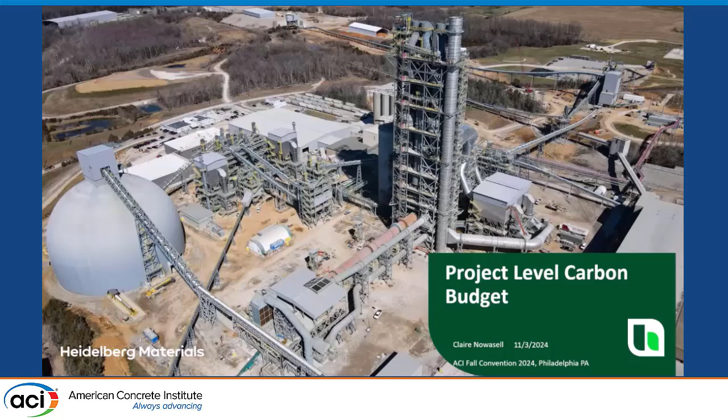Claire Nowasell, my previous job is technical service on the cement side. The title is project level carbon budget, but I really want to share what we have been learning along with our customers, which are our ready-mix producers, this past year, and what our journey is so far.

All right, agenda. Let's get structure. Some motivations, which previous presenters already covered, and review some of the progress that we made on the material side, and I want to really discuss where sustainability lives in the specification. A lot of producers, I'm not sure how many in the audience here, are really focusing on Division 3. But there are other places where sustainability is declared for the project. And lastly is carbon budget. I feel like our topics have been pretty accommodating to each other, which is very cool.

So on the motivation, the main drivers are on the legislation side. And here is a map of embodied carbon policy developed across North America. Not up to date, Maryland is not on here. But the whole idea is we see them developing across North America, across different legislative bodies, from as low as a city council to the most recent, the federal IRA, FHWA, and last year GSA also came out with the LEC, which is the low embodied carbon specification, covering not only cement and concrete, but also

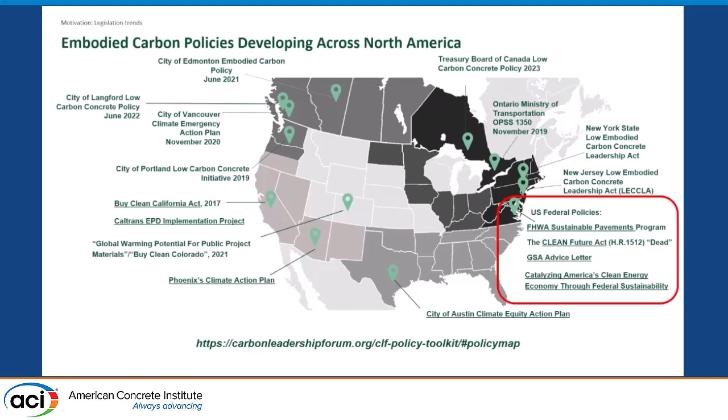glass and steel, etc. So the general trend is driving the embodied carbon on materials, specifically cement and concrete, because we are on the system boundary condition, we're much easier to target, and that's one of the reasons we are the first under the spotlight. Again, Stephanie already talked a lot about this, and this is just an overview. We're not going to hop on this.

Green building standards, not from the legislation side. A lot of the green building standards and specific schemes such as LEED, Green Globes, Envision, Living Future, which originated in the UK, but we're starting to see a lot of projects following the Living Future standard as well. You can see EPD is often mandatory, especially version 5 of LEED is going to have a huge impact.

And we remember when LEED first came out, it really drove the operational carbon change. Given what they have done for changing that landscape, I think the general consensus is version 5 will really drive the embodied carbon movement. And thank you for really getting into the nitty-gritty of version 5.

Yeah. To plug our cement PCA roadmap, for those of you who are not familiar, I really like those 5 C's. So quickly reviewing, our PCA roadmap for carbon neutrality focuses on clinker, reducing clinker content in the cement, and on cement, use less cement in your concrete. On the concrete portion, really think about optimizing your structural elements and use less concrete by volume, and then stretching out to construction and carbonation.

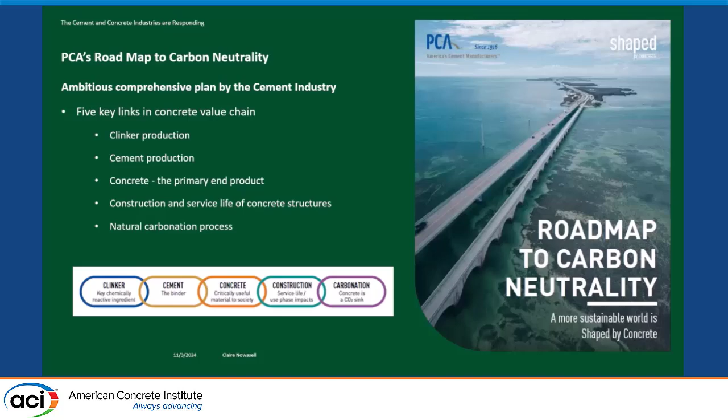All right. Our progress so far. I want to emphasize cement. I got this fresh off the press data from Jamie, PCA. I want to emphasize more than 63% of all cement consumed in the U.S. is now considered low carbon cement, which is primarily blended cement. So that's improvement year over year.

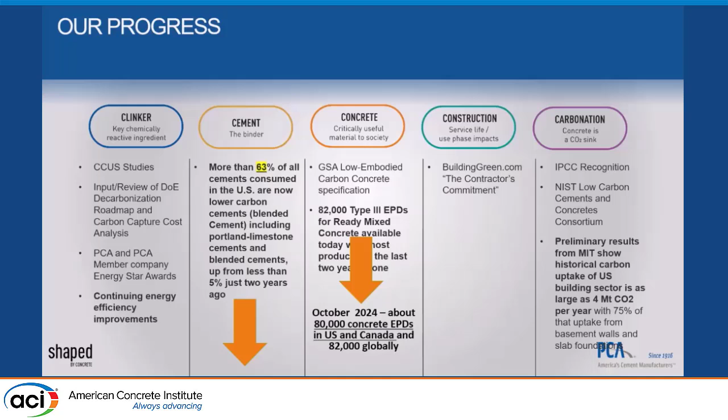And on the concrete, we are in an EPD session, so quickly review. I'm not sure the data is quite accurate. I got this from the EC3 website. As of October 2024, there are 80,000 concrete EPDs in North America and 82,000 globally. So as a country, as a continent, we're ahead of the game on EPDs. As an international company, I can say that yes, a lot of colleagues are leaning on us on the EPD and that process. So we are doing pretty good on that.

Quickly review. You can see the huge uptake from transitioning to blended cement starting 2022. This is where the 63% of blended cement is used as a share of total cement used in the U.S. Also want to mention 97% of the blended cement is Type 1L. So that's still the majority shift. If I can look into my crystal ball, the next shift is going to be Type 1T, but we'll lean on our experience with the 1L transition and hopefully learn from that and be good at that transition when it comes.

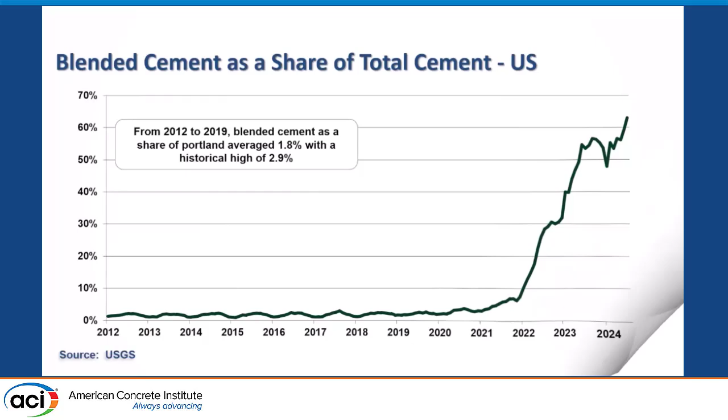Okay, so CO2 emission from concrete. If you have submittals or Excel tables on what a mix design is, convert that into a pie chart, and this is what it looks like, and it's no surprise, right? This is a mix design: 3 shovels of stone, 2 shovels of sand, and 1 shovel of cement, and then you've got yourself a mix design. And no matter how you optimize it, they never really stray away from those components. The majority, 72% on average, is aggregate.

Pay attention to the pink or orange on this. That's representing the cement. So converting that pile, a yard of concrete, into an EPD, into a pie chart, the story reverses. As you can see, the orange portion, the 10%, when converted to concrete EPDs is 83% in this case. I do want to make, you can't see the cursor. It is a concrete EPD, it is related to the functional unit of concrete. So do pay attention. Here it's about 4,500 PSI concrete. I'm not sure if it's air-entrained or non-air-entrained.

Just pay attention, cement is the lion's share of the embodied carbon just because of the process of taking the kiln up to 2,600 Fahrenheit. It is a highly energy-intensive process of making a product, versus aggregate, right? It's coming out of a quarry, you make big rock into small rock, wash it and ship it. There's not really any thermal treatment in that process. So naturally, even though it's 72% by volume, it's really low embodied carbon in that sense.

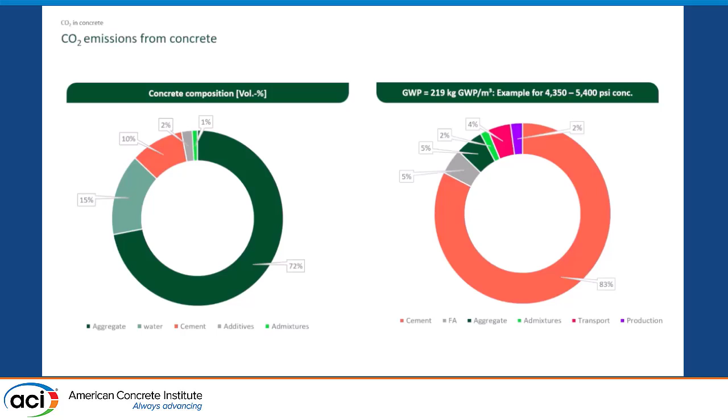Through my travels, a lot of producers challenge me: Claire, we're converting all my trucks to electric EV, the next new thing, right? Great, if you have that, great. But just pay attention, transportation in this case, this pink over here, is only 4%, right? You've got a ready mix in the middle of nowhere, a huge yard, they want to put up a solar panel. Again, you're tackling production, which is purple, 2%. So the low-hanging fruit really is the cement portion, and that's kind of driving the 1L transition and any transition going forward in the future. So that's kind of the reason, low-hanging fruit.

I briefly touched on comparing EPDs, and I do want to point out a caution on that. We talk to a lot of project engineers, designers, and even owners' reps. They oftentimes say, I've seen this EPD, it's got a 150, come on, look at it, can you produce it? So there is a cautionary note on the comparability of EPDs. It's not always apples to apples, or apples to applesauce. So do pay attention. Concrete EPDs have different functional units. Primarily, you need to pay attention to whether it's the same structural element, and particularly the exposure condition.

Not all producers will put their durability class on their EPDs. Most producers we've seen will put air-entrained and non-air-entrained on their EPDs just to differentiate. Then maturity. Some of the low EPDs take it out to 90 days or 120 days. So that's a functional unit you need to pay attention to.

Another thing is transportation is often ignored, right? You can have a producer A that has a low GWP on their mix because all their raw materials are very close, and that process cannot be replicated by a producer that doesn't have that advantage, and vice versa. So where you source your material is reflected on the EPDs. It is cradle to gate. Just pay attention. You cannot always compare EPDs that way. So when you do have a project that requires a certain level, those could be your talking points if you ever need them.

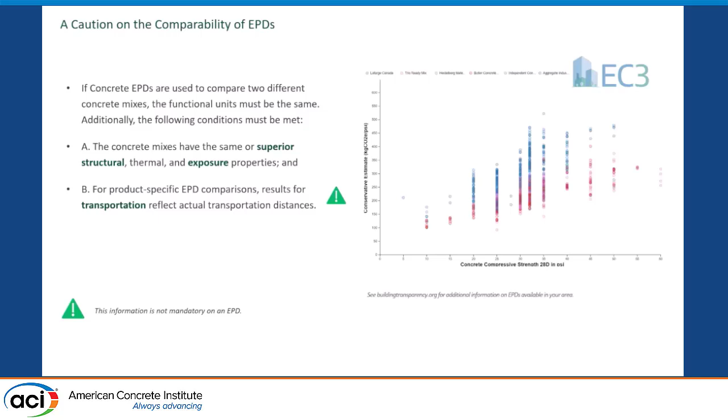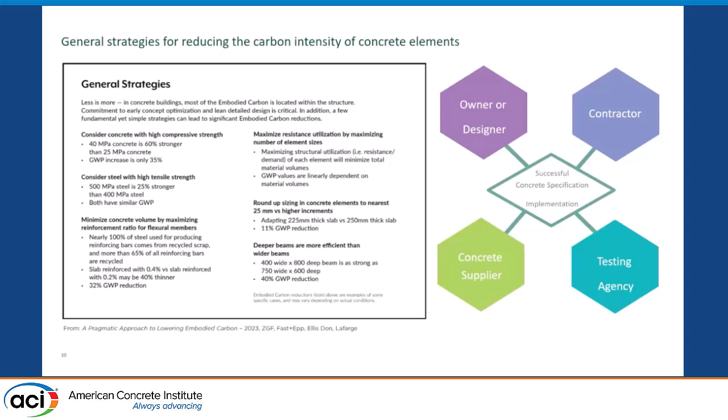Again, there are a lot of guides out there on general strategies for reducing carbon intensity for concrete mixtures. I think the general consensus is everybody has to get in the room, and get in the room early. Have a clear goal. The owner, designers, contractors, concrete suppliers, and testing agencies have to get together and have this iterative process, at different stages, right? They have to get together, have a clear goal, have a clear path, and heads have to be in the same place to make a successful low carbon concrete project.

Where does sustainability language belong?

This is a learning lesson for us too, not just only in the concrete submittal. You are a concrete producer. Oftentimes you got 03, cast in place, and you read that. There is sustainability language in the whole specification as well.

And Division 1 is really creating sustainable design requirements on these titles. And on the construction side, it also talks about construction waste management and disposals. So this, on the technical section, is really providing support for specifying a specific project. And here is an example.

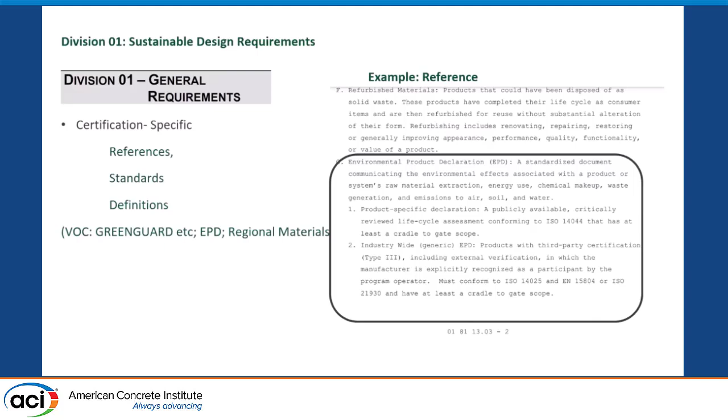So Division 1, general requirements, really kind of spells out the specific requirement, the standard, and definition. For example, for VOCs, they want GREENGUARD, or EPD, and what type of EPD? And right here, it spells out a product-specific EPD or industry average EPD, and the reference for it. And regional materials, how many miles are considered regional in this specification? Along with that 01 general requirement, there's action plans, there's a progress report, and there's a closeout.

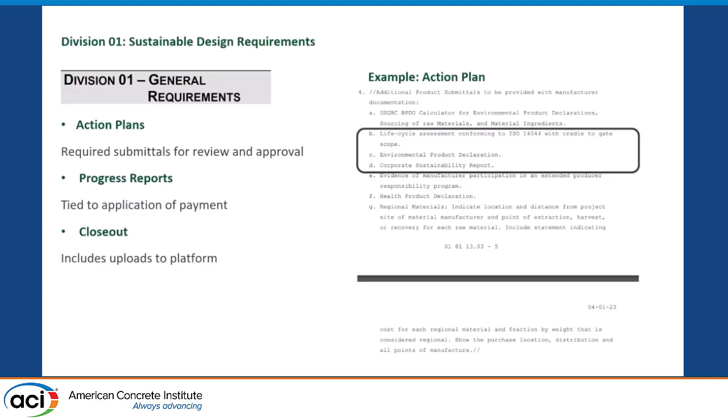So here's an example on action plan, which correlates to the EPD portion, life cycle assessment, and it just talks about where in that realm of life cycle assessment the EPD is, and also we get asked a lot for corporate sustainability reports. So that's also part of the story. And here is the sustainable material cover sheet, where we find a good place for the carbon budget cover letter.

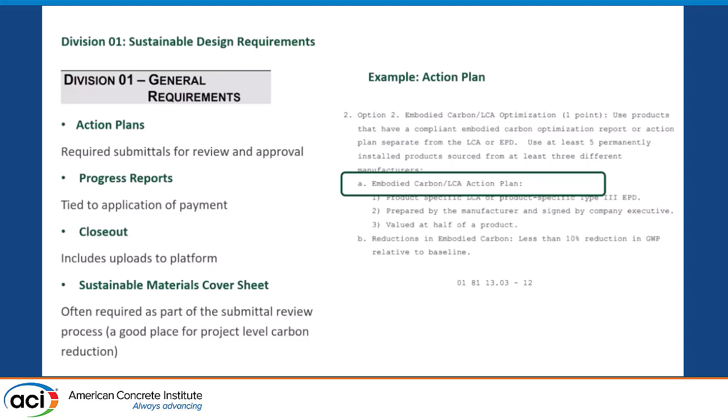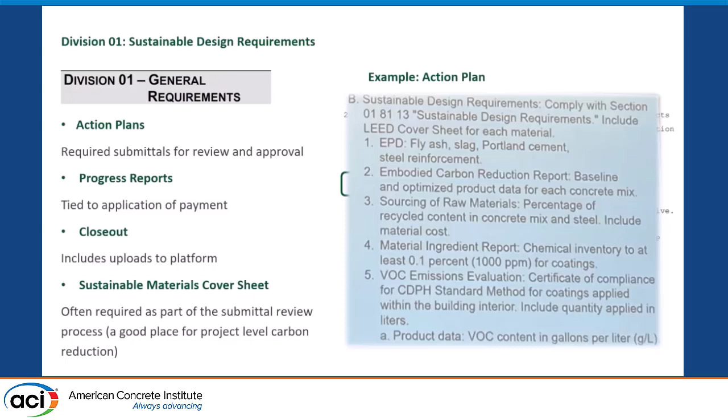And with that, we'll transition. And here is the embodied carbon LCA action plan. It kind of tells you what the project's looking for. So here is an example of the cover sheet. They want a LEED cover sheet for each material, and that's EPDs for fly ash, Portland cement, slag, steel reinforcement, and an embodied carbon reduction report with a baseline and optimized product reduction, which I think is the perfect place for NRMCA's carbon budget report or a project-level carbon reduction report.

And then this one you guys are really familiar with because we're concrete folks here, Division 3, 03 30 00, typically cast-in-place concrete. And you will occasionally start to see a lot of designers have really high goals, and they throw everything on the table, the whole kitchen sink of tools, and they may be mistakenly using contractual language such as shall. So those are the things that will have a really clear goal.

For example, right here, the first one, cementitious materials using fly ash, pozzolan, slag cement as needed to reduce the total amount of Portland cement which would otherwise be used by no less than 40%. And that can scare certain regions and certain markets and for certain elements. I mean, think about 40% for flatwork, that can be scary.

This is another example. They literally spell out all the tools, the top 10 ways of reducing carbon, and the highlighted portion is carbon dioxide mineralization. I mean, those are tools not every producer will have, and not everybody can afford to bring that onto their site for a specific project.

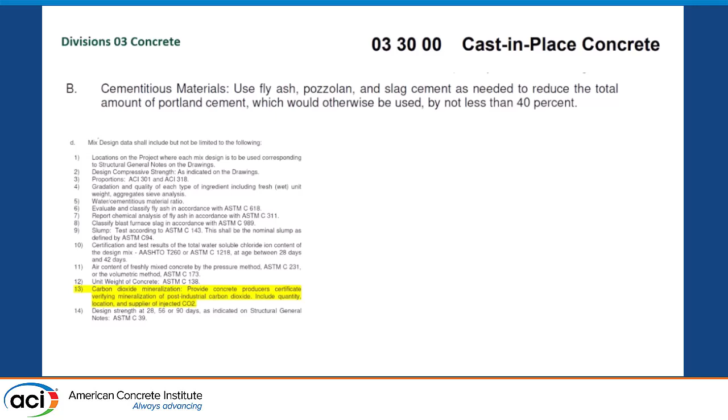We found having a cover letter and a project carbon budget reduction report has had success to showcase that the ready-mix producer knows what embodied carbon is and is already using a lot of the reduction levers such as SCMs, such as providing your standard deviation. Those are part of the story that can show the project and could be part of the reduction story as well, and can get away from those prescriptive requirements, at least 40% SCM replacement or the need for using carbon mineralization for this specific project. So here's an example where we were able to override that specification and get approved without using carbon dioxide mineralization in this case.

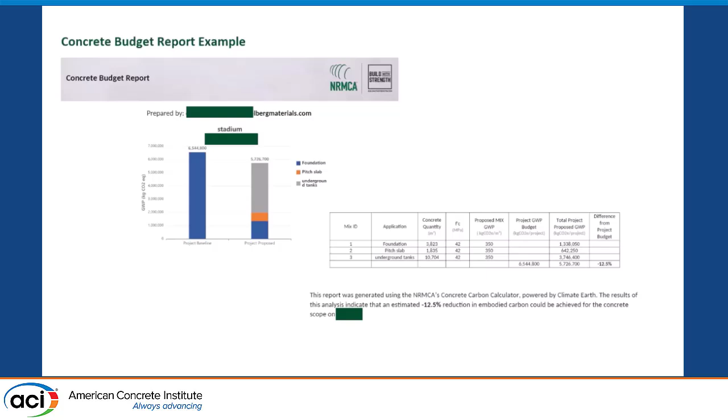So what is the concrete carbon budget? There are quite a few tools out there, but NRMCA's is the best. So the thought process is all the same: total project GWP reduction. You have to know your baseline, and it depends on the project. Sometimes they don't know the baseline, and in early project discussions, where we're oftentimes stuck is where to draw the mark in the sand, right? I think that's where the ACI 323 low carbon code is going to be really useful.

So if you can get over where your baseline is, then you can use your proposed mix designs and their associated EPDs and the GWP on there to tabulate how many yards for that mix, and then just aggregate together and show a reduction from the baseline to your project. And that's kind of what a project carbon budget means.

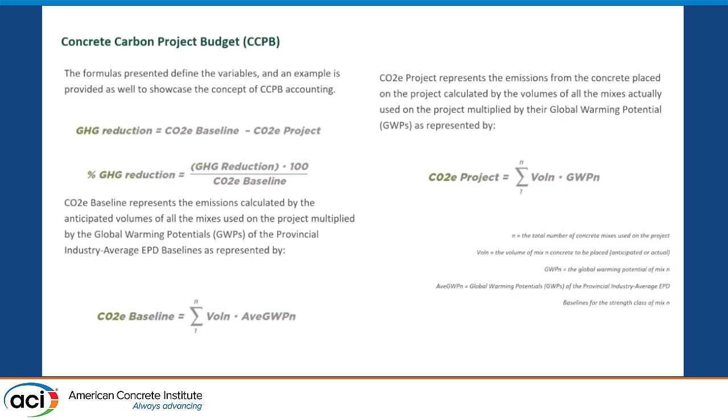Why do we do that? Not all concrete is created equal, right? Not all concrete elements have the opportunity or the room for you to reduce cement with SCMs. So looking at the whole project level gives the flexibility to pick and choose which elements have the most opportunity, etc. So as a cement producer, as a material producer, we educate the whole value chain.

So what we're telling out there is consider performance-based specification. That's always a good start. So you are no longer hell-bent on the minimum cement content or water-cement ratio, and you're using material efficiently.

This is not being recorded, right?

We're not getting hurt if you use less cement or less concrete. Just use enough for durability, for the mechanical, for the safety of your project. Don't overuse. And that's where the third-party testing lab comes in, because a lot of the time over-design is trying to compensate for poor testing practice in the field.

And using blended cement, maximize using SCMs where available, or alternative SCMs, or blended SCMs. Maximum recycled content for your reinforcement. Adjusting testing ages. I can recall a story when we were communicating with a design engineer, and when we brought up maturity, they said, I've never thought about that.

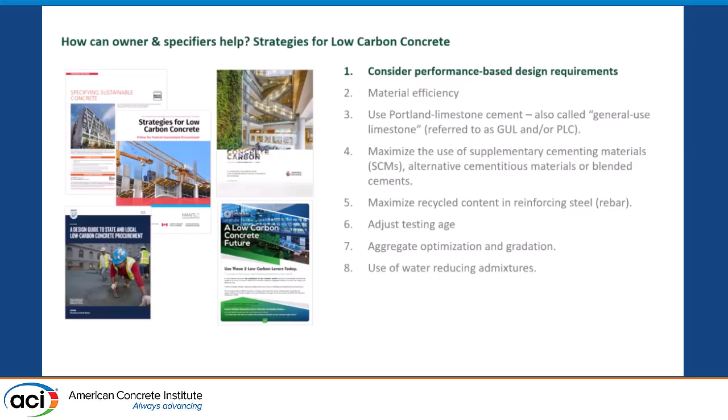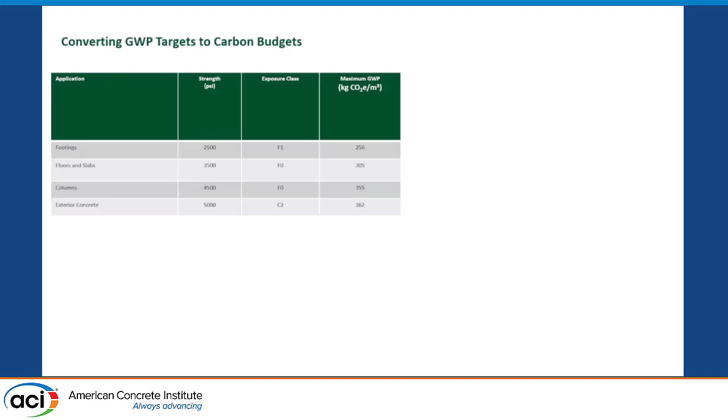This is just a final example of how to convert a GWP target to a carbon budget. I'm sorry, the font is a little small, but the first column says applications, telling you the concrete element: footings, floors or slabs, columns, exterior concrete. The second column is the design strength, 2,500 to 5,000. Exposure class can also influence the water-cement ratio and strength. And oftentimes we'll see a maximum GWP capped for that strength class.

What we mean by a project-level carbon budget is you look at the bid, right? You need 500 cubic meters for the footings and 600 cubic meters for the columns. So you tabulate all those volumes with a maximum GWP, and the total, in this example, is 754,600 kilograms CO2 equivalent for that project.

So we do encourage enforcing that as a whole, but we really don't like to enforce it at the individual mix level. For example, elevated decks or slabs may not have a lot of opportunities, due to scheduling or finishing, to reduce cement content or increase SCMs. But places like columns or foundations may have a lot of opportunities for providing lower carbon concrete.

Another thing we think could really benefit us as an industry is adding another column for a bonus maximum GWP, so producers have something to be incentivized by, right? If you put in another silo or two, if you bring in novel materials, that's going to pose a premium, right? Nobody ever talks about that.

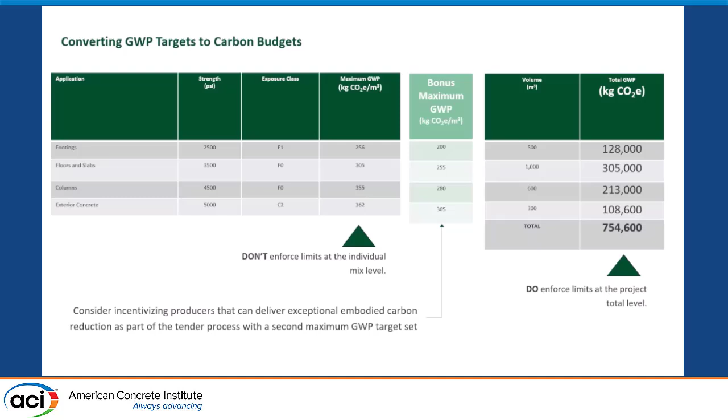But if we can get together and have a consensus on bonus and maximum GWP, that creates a benchmark for them to chase lower GWP, and they may need to really tighten up their quality control and reduce their total powder content. That's a cost to the producer, and that should be incentivized. So for any specifiers in the room, please incentivize the innovators in the industry.

Here is an example we can use because we did a case study. This is straight out of the Canadian report on successfully implementing low carbon concrete. This is a school that our ready mix business did in Vancouver, BC. Here are the steps. Calculating concrete, first you need to know the baseline. You may have a preliminary, you may have a final.

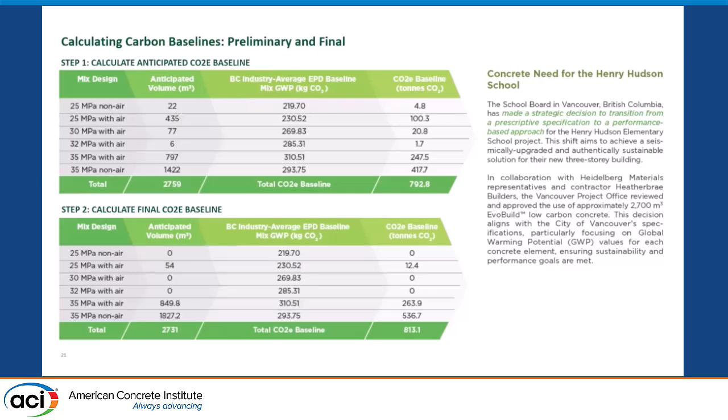Remember we talked about how you may not use all the concrete efficiently. So the first step is to calculate the anticipated CO2 baseline, and then you look at all the concrete you may or may not use, or where you can thin out the section, and come up with another baseline for the final goal of the project. And then step 3 is for your ready mix producer providing their mix, plugging in the volume and having an as-built or project-level carbon budget.

So in this case, the final baseline for the project was allocated at 813.1 tons of CO2. As built, the impact was 657. So we have a total reduction of nearly 20%, 19.1. So that's the workflow when we talk about a carbon budget and what it looks like. It's quite simple. It's simple math.

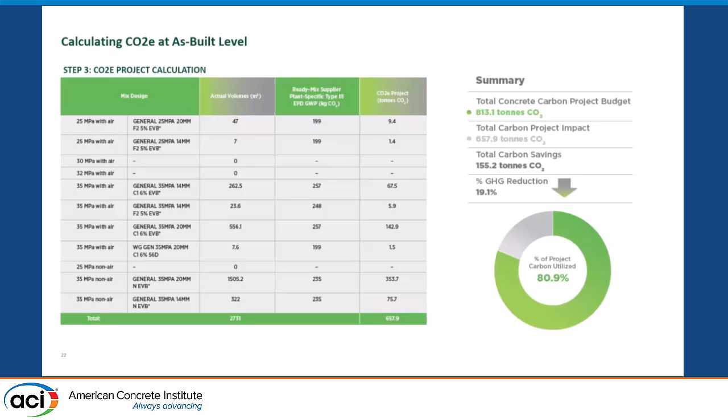But imagine you have a pie chart in your cover letter as part of your bid. I think it really tells a cohesive story, like a snapshot of how you are doing on GWP. It really sends a clear message to the project. And that is it.